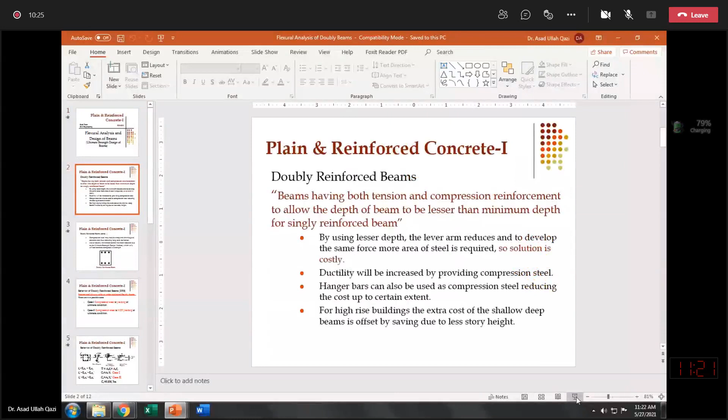So our topic, a very important one, is doubly reinforced beams. Beams having both tension and compression reinforcement, to allow the depth of the beam to be less than the minimum depth required for a singly reinforced beam, will result in a doubly reinforced beam, like this section shown to you.

For example, if there are 3 bars on the tension side, I may draw a tentative location of the neutral axis. If the neutral axis is somewhere over here and there are cracks at ultimate, on the tension side bars are present, and even on the compression side bars are present, and the depth of this beam will be shallower than the depth which we calculate for singly reinforced beams, what we have studied up till now, whether it was allowable stress design or ultimate strength design.

In ultimate strength design, I derived one equation for d minimum, and that d minimum equation we use to fix the depth of the beam. That equation was Mu over 0.205 fc prime into bw. So based on this equation, we fix the d value.

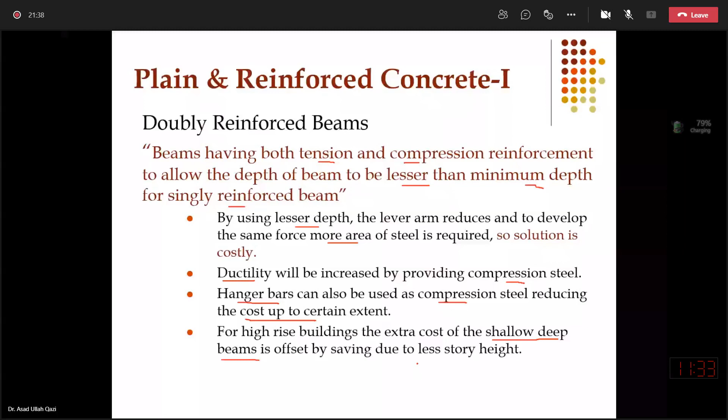So in the first bullet, I mentioned that the doubly beams are costly because steel required is more. But you can imagine that if the beams are singly and you need the beam depth 1 meter and you need the clear story height 3 meter, it means then you need a total story height of the floor 3 plus 1, 4 meter. And if there are some restrictions above road level that you can't go more than suppose 50 meters above the road level, you can divide that 50 with 4 and you will get number of floors what you can add.

But in case of doubly beam, if you can finish the beam within 0.5 meter, it means your clear story requirement from architect was 3 meter, 0.5 is your beam. So total it will become 3.5. So it means 50 divided by 3.5 will give you number of floors what you can add above road level.

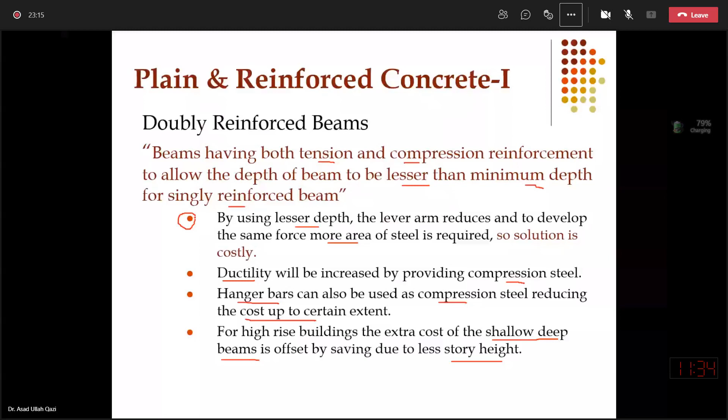So in this way, in case of shallow beams, you can get more number of floors, and in this way long term you can obviously judge that a building with more number of floors will give you more reward in terms of sale, purchase, or in terms of rent, rather than a building which has less number of stories. So it is normally preferred to have the more floors, especially when the land cost is very high in commercial areas.

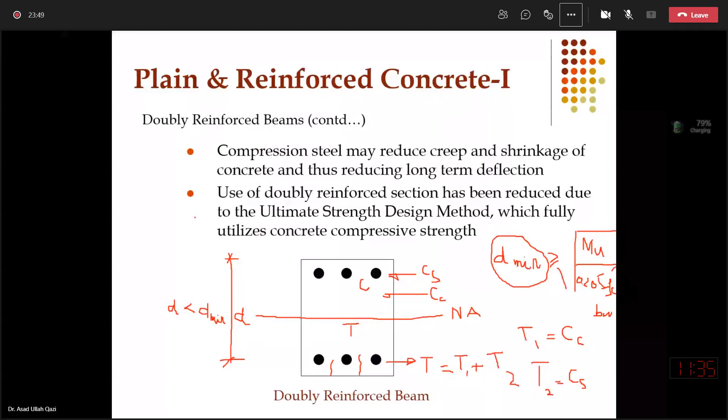Compression steel may reduce; presence of compression steel in doubly beam. The other advantage is, you know that concrete is prone to creep and shrinkage, and it will increase the long-term deflections, and it is a big demerit of concrete. If the steel bars are present on the compression side, it means some of the volume of concrete is replaced with the steel,

and hence you will be able to reduce long-term deflections if you are providing doubly beams, because the creep and shrinkage in compression zone of the concrete beam will be reduced because steel is present there, and some of the area of the concrete in section and in the element in terms of total volume of concrete is reduced.

Use of doubly reinforced section has been reduced. It means application of doubly beam after this introduction of ultimate strength design, which fully utilizes the concrete compressive strength. It is just one comment that earlier when there was ASD in practice, allowable stress design, we stressed the concrete up to 45% of f'c, and then we designed at service loads.

Now, since in ultimate strength design, we are using the complete area under the concrete, so up to 85% of its peak. So as a matter of fact, the C force calculation is now under the complete area of the concrete. So it is stated that with ultimate strength design, we can develop a reasonable Cc compression force with concrete alone. So as such, the introduction of additional steel to develop a couple may be little needless, but it is just one observation or comment.

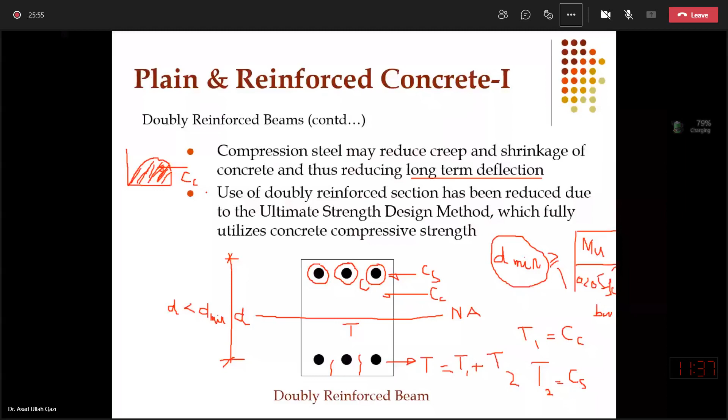But still, when you are going low in height as compared to D minimum required, and also concrete strength is not too high, you have to go for the doubly beam design. You need to provide some bars in the compression domain to provide the additional couple.

Now, in terms of doubly reinforced beam classification, there are two types of doubly reinforced beams. There are case 1 and case 2 doubly beams.

Just give me one second. Okay, let me continue.

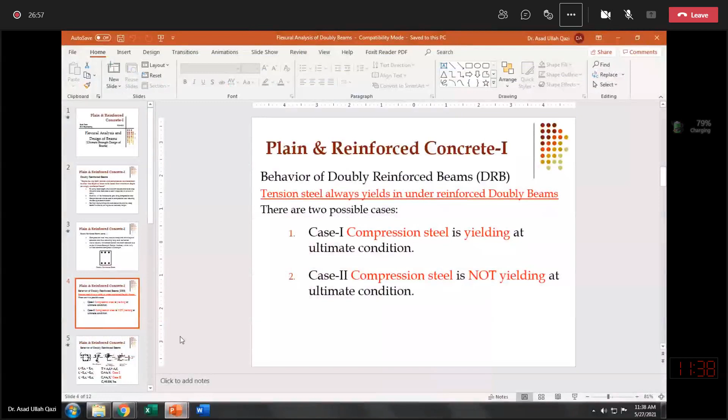In terms of doubly beam classification, there are two types of doubly beams. Like in singly beams, we mentioned that singly beams are under reinforced singly beams, transition reinforced singly beams, or over reinforced singly beams. Similarly, even in doubly beams, we will design the doubly beams tension controlled, under reinforced. We want the tension steel strain in doubly beam above 0.005.

But if it is in between 0.005 and epsilon y, so if they are transition reinforced doubly beams, still they are acceptable. But over reinforced doubly beam is objectionable. It is not preferred, or you can say, not allowed to design over reinforced doubly beam. Just like a singly over reinforced beam, a doubly over reinforced beam is also dangerous because it will give us brittle failure without warning.

So it is mentioned with the red color underlined that tension steel will always yield in under reinforced doubly beam. So then question will arise, what is the classification then? In doubly beam, there is one more puzzle, and that is, what is the status of compression steel at ultimate?

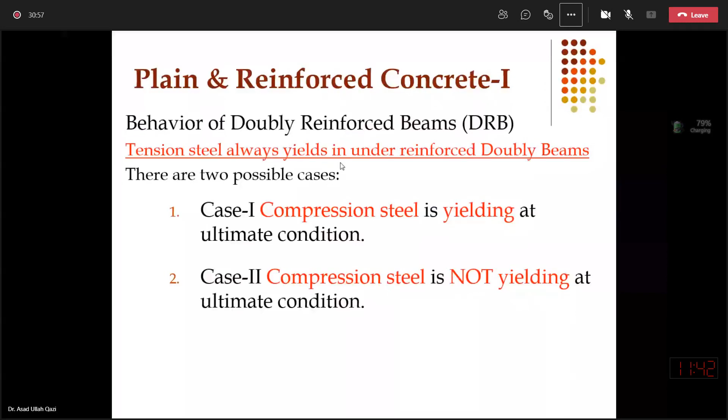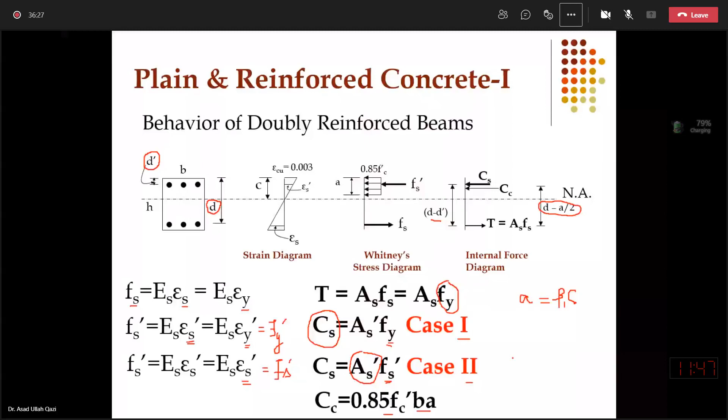So if the strain is below yield strain, then obviously we will have a stress value below Fy. So that we want to explore. On the tension side, there is absolutely no ambiguity that tension steel must be at yield, because otherwise we will get an over-reinforced doubly beam, which is unacceptable, and we are not going to design such beams. So even in case of doubly beam, the question remains the same, whether it is case 1 or case 2: where is the neutral axis.

So when we are analyzing the doubly beam, just like singly, the question is where is the neutral axis. In the singly beam, the equation was T equal to Cc. Now we have the presence of two materials on the compression side. It is a composite of concrete and steel. So actually the total tension steel will make equilibrium on the cross section with Cc plus Cs. And since we are now writing the equation for case 1 doubly beam, we have no objection to put the compression steel at yield, and there is absolutely no doubt that tension steel is at yield.

So in our equilibrium equation, the second component Cs is new, and when I expand this Cs, it is As prime into Fs prime, and since we have case 1, Fs prime is equal to Fy. So if you are performing an analysis and you are given the cross section, in my recorded lecture you will find a very detailed discussion from this slide onward. Let me just draw the sketch so that later, when you watch the 2-hour recording, you will get a good idea to understand the discussion from this slide onward.

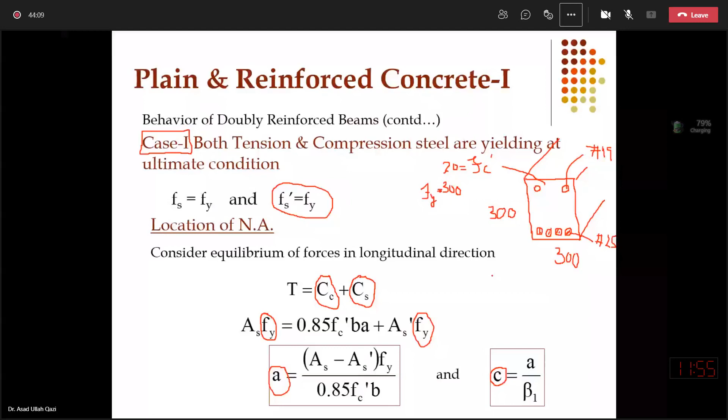But if you write this equation of case 1 and you get a and then c, and once you check that both steels as assumed in this equation are at yield, you get the idea that no, with this neutral axis depth, compression steel can't yield. Then it means you will discard your calculations and you will rewrite this equation by changing this Fy with Fs prime, and you will recalculate a and then c to get the neutral axis depth for case 2 doubly beam, and then you will get the internal capacity.

In that 2-hour recording, I have done this calculation for case 2. I have taken this example, and you will find in that video that this beam tells us that this is not case 1, it is case 2 doubly beam. Then accordingly, we revised our calculations and did the reanalysis of the neutral axis depth, and then we got the capacity.

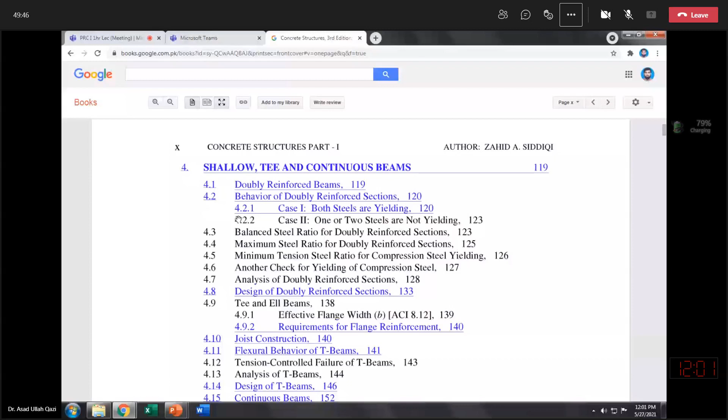So I will ask you to submit them in hard form once you are on campus. So be ready, keep preparing. Keep solving the questions, maybe on loose pages or in a register. So if later on I give you some deadline for submission, you can submit chapter 3 and chapter 4 solved and unsolved problems. Agreed? Agreed, sir.